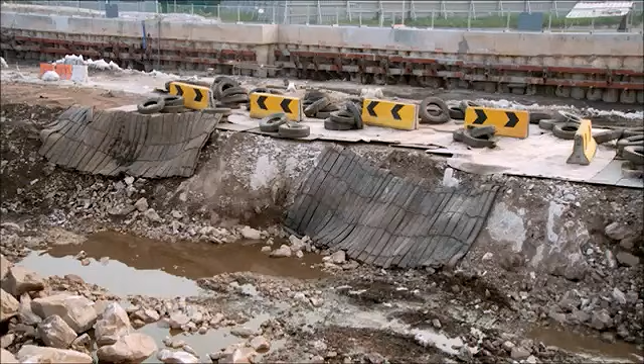Now there's an ambitious solution. A new transit system that will crisscross not only the city, but the entire region of Greater Kuala Lumpur. Huge machines will bore into Kuala Lumpur's treacherous bedrock to carve out almost 10 kilometers of tunnel.

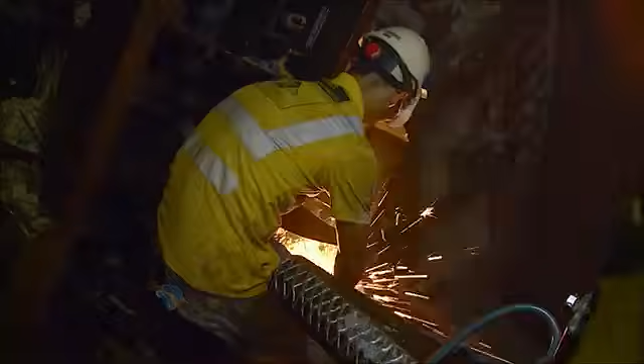Every day of construction, the engineers confront the perils of mechanical failure, fire, and collapse. Get it wrong and billions of dollars of investment could go to waste, and the streets of Kuala Lumpur and its pent-up economy will stay trapped in gridlock.

Kuala Lumpur is one of Asia's most vibrant cities. It's looking to compete with the region's Asian tiger economies. Its magnificent skyline testifies to its soaring ambition. But at street level, it's a different story. The city is blighted by severe congestion that threatens its future growth.

Over 7 million people live and work in the Kuala Lumpur region, the Klang Valley. Every day, they head into town in 4 million cars. As an alternative, a light rail transit system was built. But over time, it has been overwhelmed, and connections are inadequate.

Now there's a solution: a new mass rapid transit system that will reduce the pressure on traffic and unite far-flung parts of the city. For any modern metropolis to be vibrant, to be competitive, to be on par with some of the leading cities in the world, you've got to have a modern public transport system.

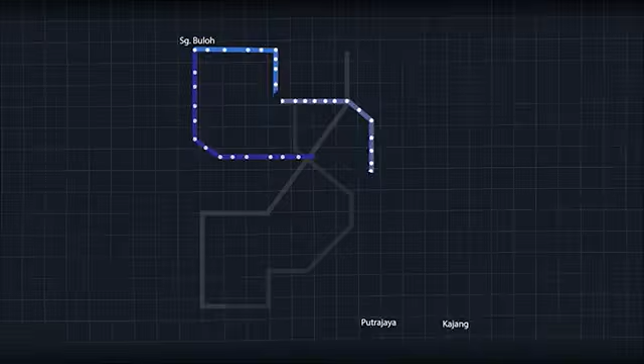The Klang Valley Mass Rapid Transit System, the KVMRT, is Kuala Lumpur's bid for greatness. 3 different routes comprising more than 150 kilometers of brand new lines. It will be seamless travel around the Klang Valley, especially the areas of high concentration population. And the first stage of the plan is the biggest test of all.

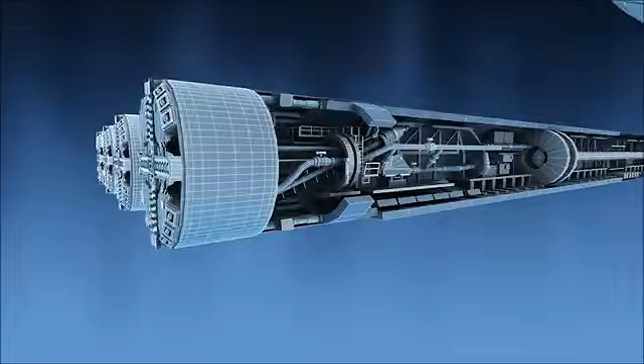This is the Sungai Buloh Kajang line. It will stretch 51 kilometers with 31 new stations. And a fifth of the new line will have to be constructed underground. To do this, 10 giant tunnel boring machines, or TBMs, will be brought to Kuala Lumpur and set to work.

These mighty engines do much more than burrow through rock, astonishing though that process is. As the huge drill crunches forward, the back end constructs the tough tunnel frame with high-strength concrete. In charge of this massive operation is engineering veteran Satpal Bogal.

Most cities now, for railway mass transit systems, the tunnels are built using TBMs because of safety issues and because of ground conditions. The underground section of the new MRT will be a perilous undertaking. For beneath Kuala Lumpur is a formidable engineering challenge.

Below the city are 2 very different kinds of rock, and the TBMs will have to deal with both. The western area is known as Kenny Hill, and the eastern areas as the Kuala Lumpur limestone. Imagine the difference between a Dutch Edam and a Swiss cheese riddled with holes. Dr. Uilian Hock is the project geologist and expert on Kuala Lumpur's underground world.

I got this Dutch Edam cheese here. As you can see, this whole piece of cheese is fairly homogeneous, very tight. And Kenny Hill, when it's weathered, it looks something like this. This is like the KL limestone. All right, this is Swiss cheese.

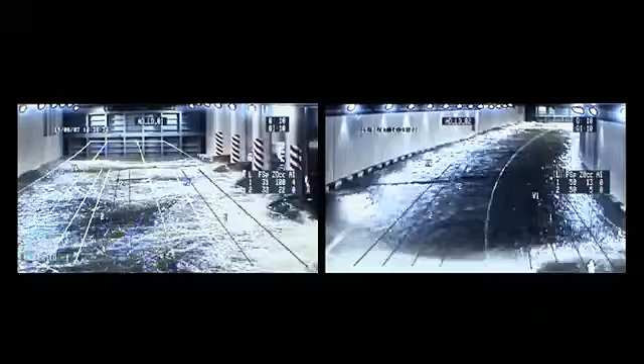This ingenious system was used by the engineers who built the Smart Tunnel in Kuala Lumpur, the world's first combined storm and traffic tunnel. But builders learned some hard lessons about slurry. Ng Hawe was a rookie engineer on this project. We have the best machines in the world in the SMART project, but we still do have some problems. We just couldn't control the slurry and it easily escapes to the surface, creating sinkholes.

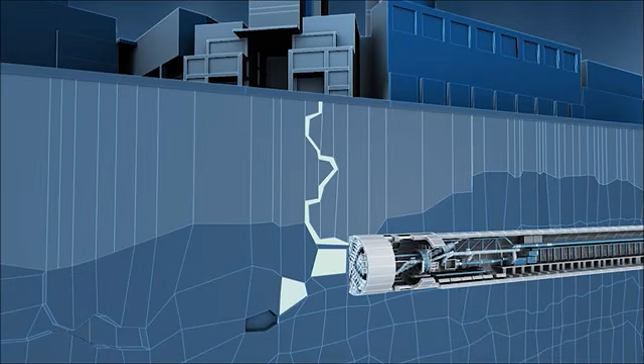What Ng and the engineering team found, to their cost, was that the slurry they injected into the limestone cavities could escape into surrounding rocks and cause havoc, bursting from the ground like a geyser or creating sinkholes at the surface that might suck in people, cars, or buildings. Today, Ng heads the tunnel team building Kuala Lumpur's MRT system. And this time, he had to find a solution to the uncontrollable slurry problem.

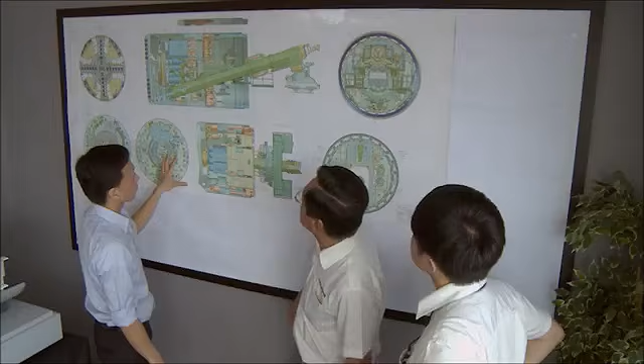Working with German company Herrenknecht, Ng and the team of engineers have come up with a revolutionary kind of machine. We throw in all the ideas, we have brainstorming sessions, we consult a lot of experts, we have to do a lot of research because no machine has been designed like this before. From these brainstorming sessions was born this mighty machine. Called the Variable Density Machine, it's the state-of-the-art tunneler. For the first time, a TBM can control the consistency of the slurry and take on whatever Kuala Lumpur's underground throws at it. Even the construction of this revolutionary machine is on an epic scale.

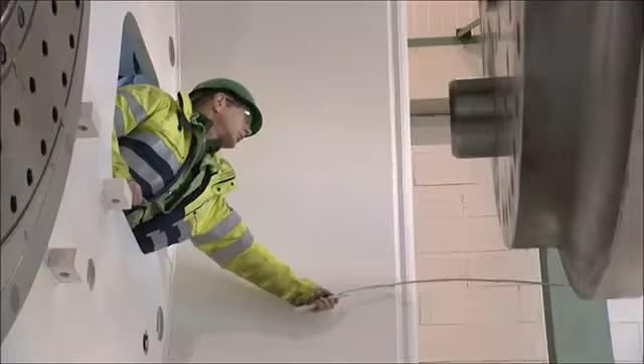Components are brought from all over Europe to be assembled inside the massive factory in Schwanau in Germany and other Herrenknecht plants in China. One machine like this is fitted together with about 40,000 pieces, one by one. The design starts screw by screw, piece by piece, and this is brought together with all our 400 engineers. They do all these works to come to this level, what you can see today. It takes 9 months to manufacture the revolutionary TBM.

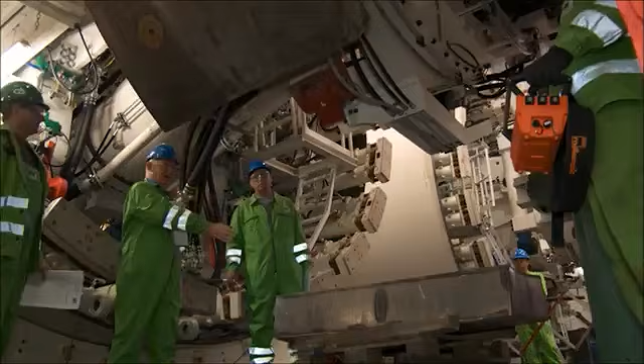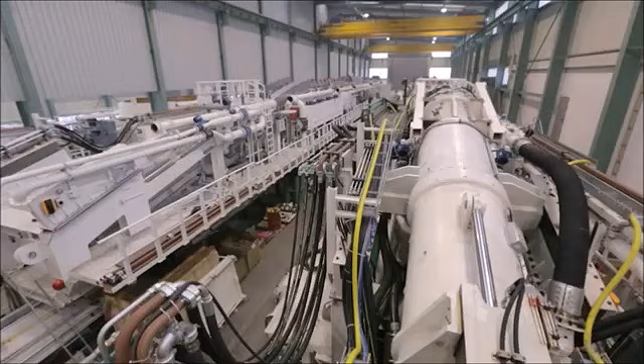Today, it's ready to be put through its paces. We have only seen it on the drawing board so far. So this is the first time that it is all put together. Everything is running, so we can check every equipment, including the cutter heads, the hydraulics, the safety features. This is the last chance for us to make final modifications before we send it to the site and put it in the ground.

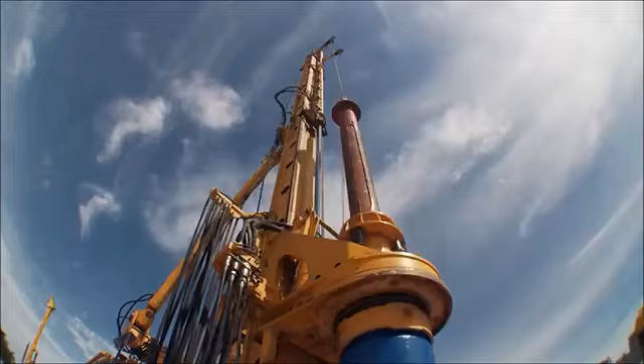As the engineers work on the TBMs in Germany, work gets underway in Kuala Lumpur. The engineering company in charge of tunneling, MMC Gamuda KVMRT, must complete the job in 24 months and with minimum disruption to the city above. The operation is conceived on a military scale and with military precision. The TBMs will be launched from 4 different staging zones along the planned route of the underground section of the MRT. At the western end of the tunnel, the elevated section of the MRT begins its descent underground from the surface. But at the 3 other zones, shafts must be excavated so that the different TBMs can be put to work beneath the city. Eventually, the different sections of the 9.5-kilometer tunnel must all link together.

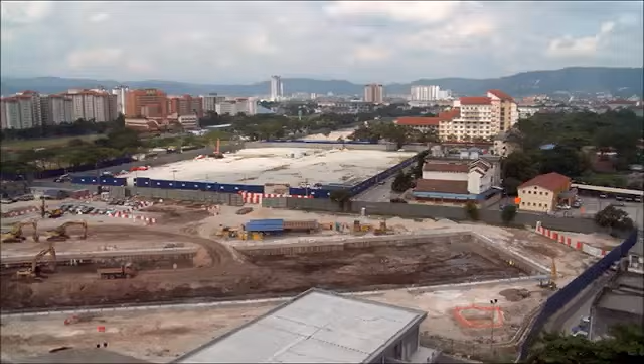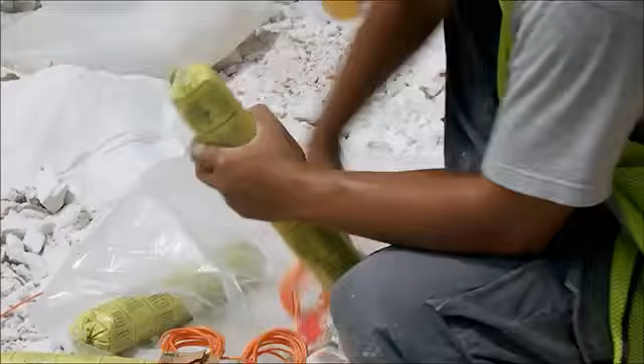Since July 2011, work on Kuala Lumpur's new MRT starts here at the Cochrane site. It must be dug out to a depth of 30 meters before 4 TBMs can be deployed. The huge staging zones will be blasted out of the ground. We have short time to meet our requirements, so we are working with frequent blasts, more than 2 or 3 blasts a day. The blasting must be carried out with rigorous precision, especially in a city as dense as Kuala Lumpur.

So when you talk about blasting itself, it's dangerous. You can see we've been surrounded by high-rise buildings. Now at the moment you're using about 150 to 200 kg. So that can bring a 10-story building down. The solution is to sequence each blast, creating a pressure wave that, in theory, won't damage surrounding buildings.

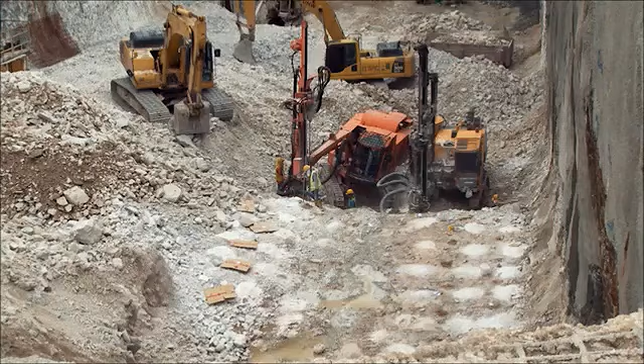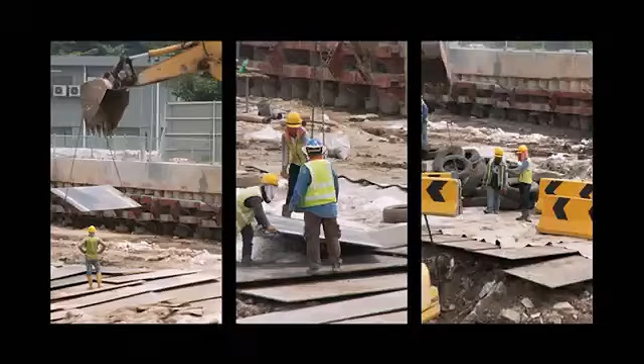These are the basic things we use. My hand now is explosive, which will be charged to the detonators over here, and it will be connected one at a time, and finally we have delays. This will segregate the blasting rather than at one go. Engineers dig rows of holes between 3 to 6 meters deep. Then the explosive charge is inserted inside with a detonator. These are connected to a central command point. But nothing is left to chance. Giant barriers of steel plates, truck tires, and concrete prevent debris flying from the site. The charge is set.

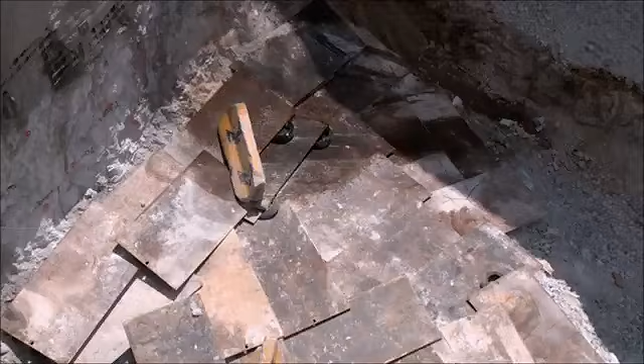The engineers have got the right formula, and the surrounding buildings are safe. The blasting continues at the Cochrane site for 7 explosive months. Enough rock and soil to fill 50 Olympic-sized swimming pools is blown out of the ground. And finally, the site is ready to receive the first TBM.

Its code name, 774. At the beginning of 2013, the first new model arrives in Kuala Lumpur. The giant machine is transported in parts to the Cochrane site on huge lorries. But that's the simple part. Now, the 160-ton monster must be lowered into the excavated shaft so that they can start chewing into bedrock.

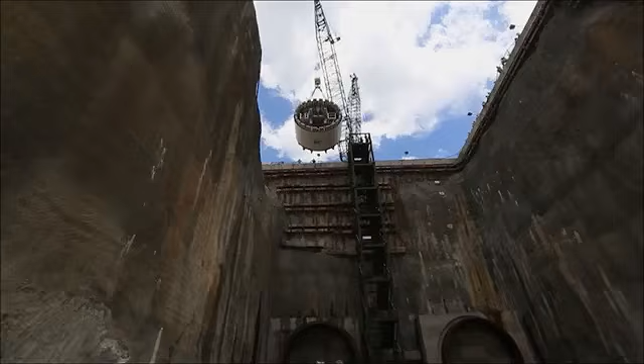To lift it down 30 meters down the shaft, we have to be very careful. Anything can go wrong and then we are stuck. It will push back the whole project completion by a lot. At the site, everyone is holding their breath as the TBM begins its descent underground.

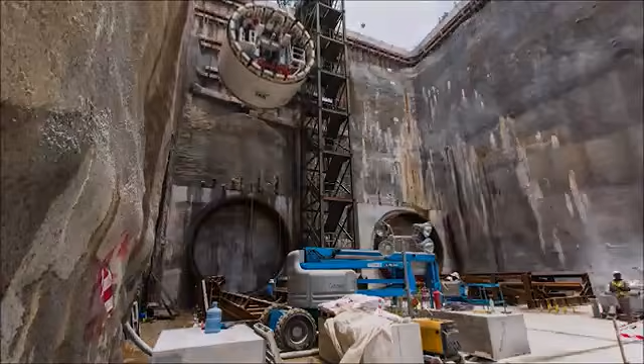Malaysia's capital, Kuala Lumpur, is being transformed into a huge building site. A new MRT system is under construction. Close to 10 kilometers will be built beneath the city, and a revolutionary new tunnel boring machine, or TBM, is brought from Germany. The first to be sent into action weighs 160 tons and has to be delicately lowered 30 meters to the tunnel entrance.

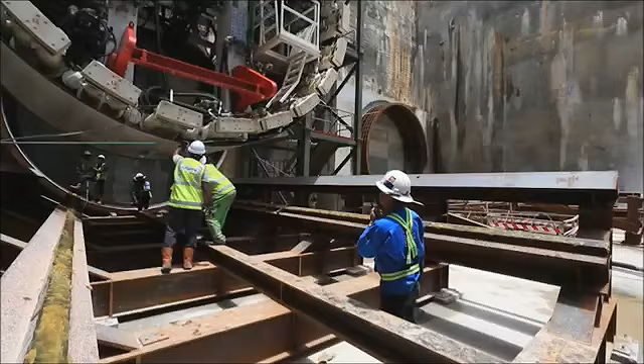The man in charge of the tunnel operation is Ng Hao Wei. He won his spurs building Kuala Lumpur's famous smart tunnel. And we are dealing with very delicate components. We cannot afford to damage it. If the extent of damage is huge, then the impact to the project will be tremendous.

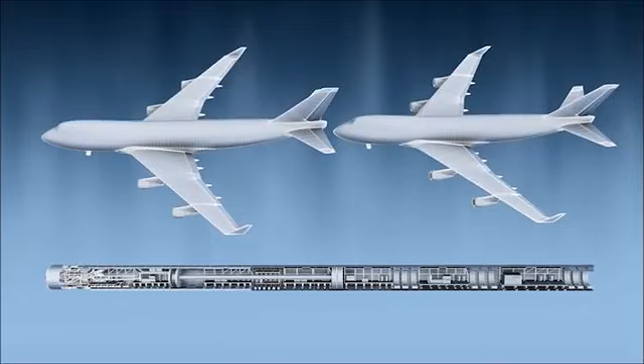This is literally the cutting edge, the business end of the huge machine. The circular cutter head weighs 70 tons with 37 tungsten carbide cutting discs, which are stiffer than steel and denser than titanium. The entire TBM is 135 meters long, almost double the length of a 747 jet airliner. Each TBM has 10 interconnected gantries to support the operation.

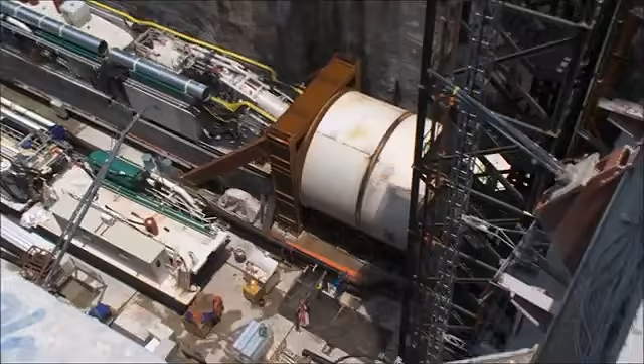Only 3/4 of the shaft has so far been excavated, so the monster machine has to be assembled in sections. We assemble up to the 6th gantry, which will give us the key components of hydraulics and electrics, so we can start to launch the machine, at the same time give sufficient space for the shaft excavation to go on. It takes just under 3 months for the TBM to be assembled.

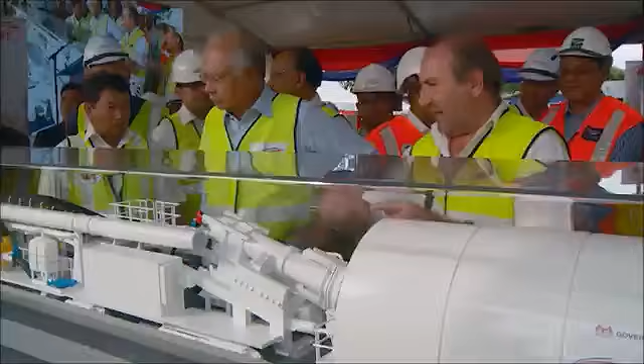The Prime Minister of Malaysia launches the very first variable density TBM. It's actually a technological marvel. And it goes to show that, in partnership with a German company, Malaysians can offer a lot of our technical guidance and advice. This is something that we can be really proud of.

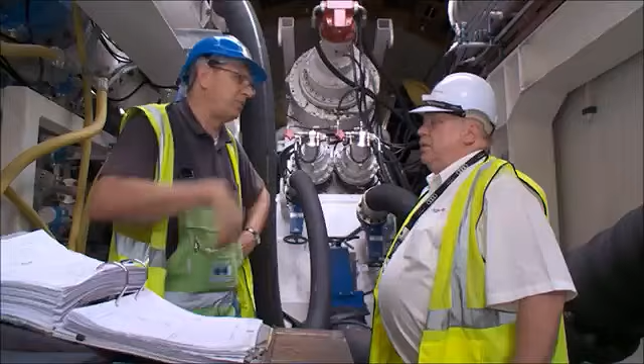One day later, Ng Hao Wei and his mentor Gustav Klados arrived to check on the machine's progress. Gus, a veteran Hungarian tunneler, has worked on some of the biggest tunneling projects in the world, including the Channel Tunnel linking Britain and France, and the Smart Tunnel here in Kuala Lumpur. This tunnel warrior is the team's project manager and is thrilled to be working back in the city on the new machine. It's uncharted territory.

We are trying out something totally new. A lot of people at the beginning said, no, it won't work. But now it is excavating. You can hear the stones moving around in the pipe, so it's a fantastic noise. It's my favorite. Much better than in the office. It's not just the machines that will need breaking in. The giant TBMs must be served by an army of workers, day and night, week after week, month after month.

I'm new here, but I try to make my best every day. Everybody starts as new. Trust me. Me too. I did start as a new guy. Do you? Yes. My first job was to go and count the number of nails and bolts and nuts in the stores. And I went there and literally counted them for a week. When I finished, went to the storekeeper and he told me that we usually use a scale.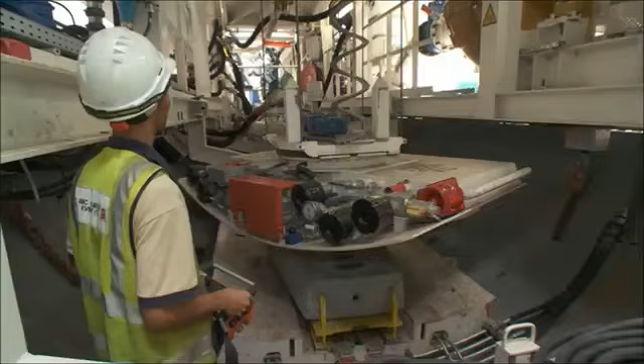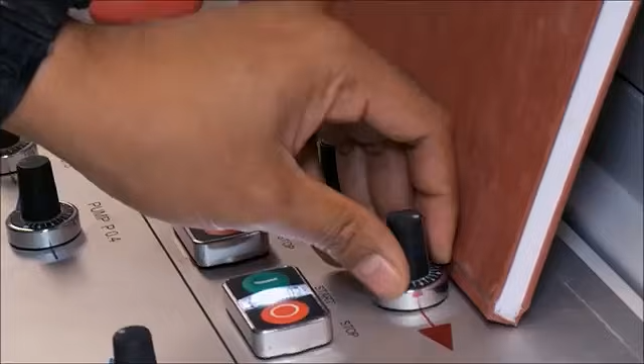The MRT tunneling project will need thousands of workers over the 2-year period of construction, and MMC Gamuda set up an academy to train the hundreds of workers needed to finish the tunnel on time. Veteran or newcomer, the team faces a daily avalanche of problems, and right now, the problem is pretty basic. The TBM is just not picking up speed. 8 millimeter a minute. Not very fast. But it's all right.

At this pace of tunneling, the project will take 4 years longer than expected and run millions of dollars over budget. But veteran engineer Gus Klados hopes that the giant machine will soon pick up speed. In the next few months, it is just to sort of break in the machine like a horse which has never been ridden before. And I am convinced that we will make it work.

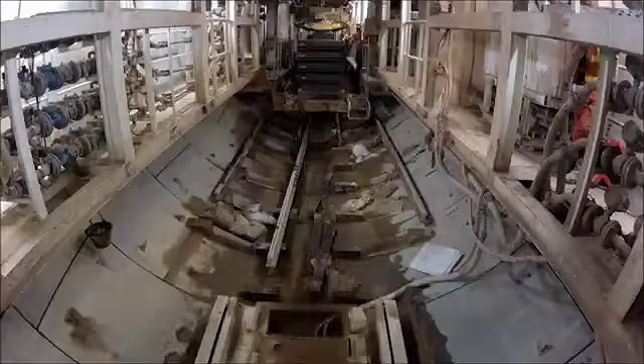The team is under pressure to complete the tunneling works on time. In the tunnels, the TBMs never stop mining. It's a 24-hour operation. And 3 weeks since mining began, the giant machine has at last picked up speed. The TBM is like a huge underground factory, drilling, building, and spewing out waste. The heart of the entire operation is in this tiny space.

So what's happening? Pressure sensor number 4 is a broken wire. Control cabin means the heart, the control center, the heart of the TBM where everything is controlled. We need to push one. If you're building a skyscraper, visibility is not normally a problem. But underground, it's a different story. You can't see through rock.

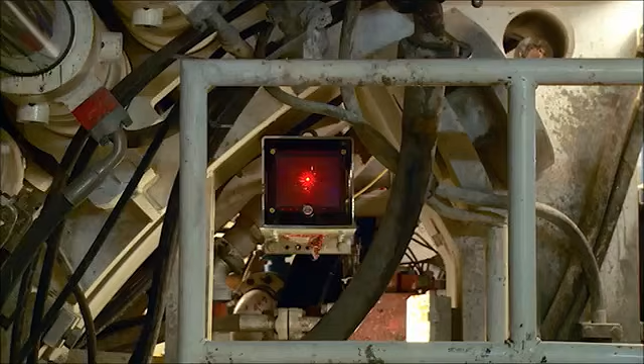So to give the TBM underground eyes, the machine is equipped with arrays of sophisticated sensors. It's like when you are working in a submarine. You have to depend on the sensors, you have to depend on communications, you have to depend on eyes other than yourself. You can't see anything. Inside the control cabin, engineers can work out with absolute precision the real-time position of the TBM, calculate changes of direction, and when to start lining the tunnel wall.

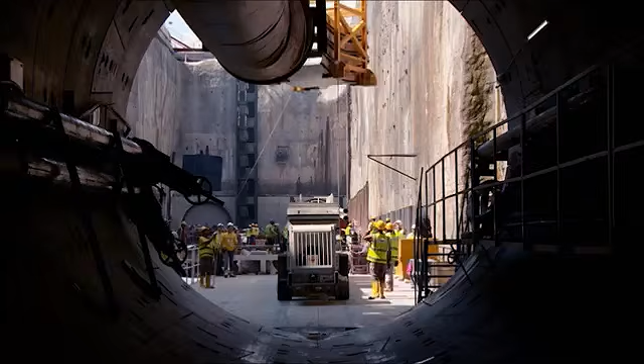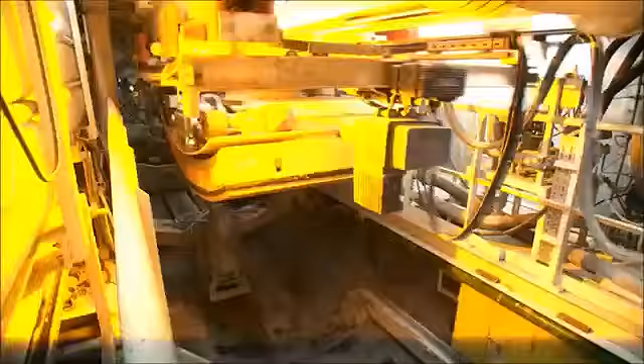After a mining of about 1.4 meters, we will build the segments piece by piece and then build them up like a jigsaw puzzle. These tunnel rings are made from 7 segments plus 1 keystone that holds everything together. The concrete wall segments can withstand extreme pressure 30 meters underground. All day long, concrete segments arrive at the TBM. Each segment weighs 2.2 metric tons. Giant hydraulic arms swing the segments into place using the TBM's vacuum erector, which uses the power of suction to raise and position each segment.

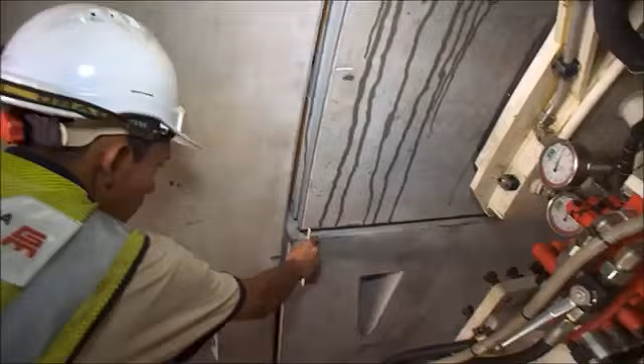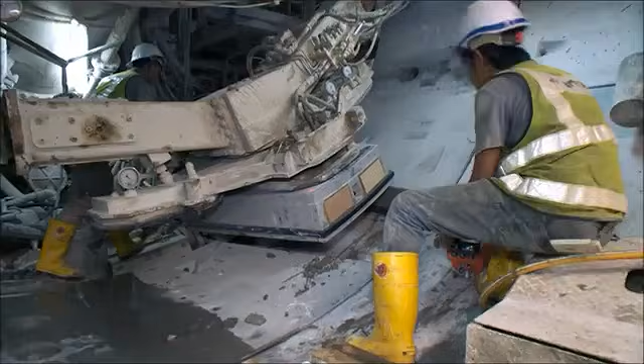Precision is essential. If any one of these segments is wrongly positioned, the consequences would be catastrophic. So it's very important to drum into the ring building team that they have to build it to the required tolerance of a few millimeters precision. If we are out of tolerance, the water will find its way to seep through and we'll have a great problem to seal it up. Over time, as graduates of the Tunnel Training Academy get more experience, the process builds up momentum. In the first week, the teams managed to place just 3 rings a day. 3 months in, and the rate is 5 times higher.

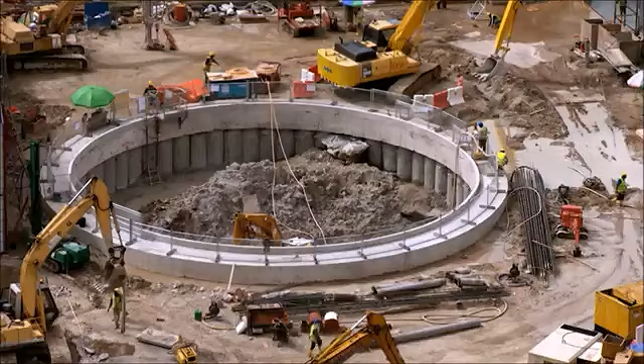The campaign to excavate Kuala Lumpur's new MRT tunnels is about to enter a more intense phase. By November 2013, 4 TBMs have been successfully launched from the Cochrane site. But at another launch site near Inai Road, the engineers have run into difficulties. Here, 2 circular shafts are being excavated to 30 and 45 meters in depth. But as the shafts are blasted out of the ground, disaster strikes.

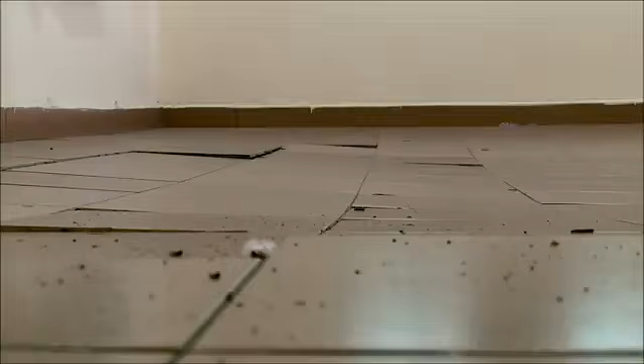The hole in the garden is frightening enough, but the condition of Mr. Jamal's home is even more alarming. Floors dip and cracks ripple up walls and across ceilings. The family home is falling apart.

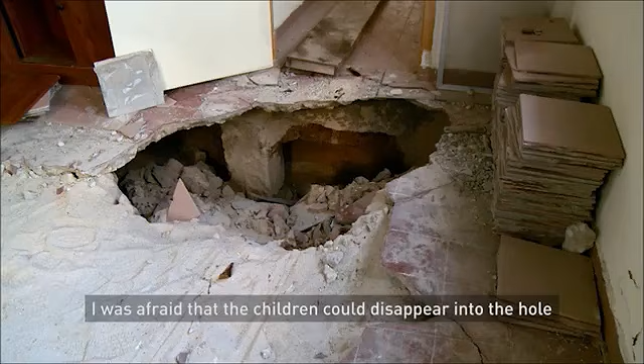Terrified, Mr. Jamal calls the company in charge of the MRT project. When inspectors see the condition of his home, they make an immediate decision to move the family out. Engineers now need to explain what has gone wrong and whether other homes are at risk. In limestone, what happened is that the solution features can be connected laterally and vertically. What happened is we drill a shaft. So this hits a connection. When there's a hole, it's like a pipe culvert.

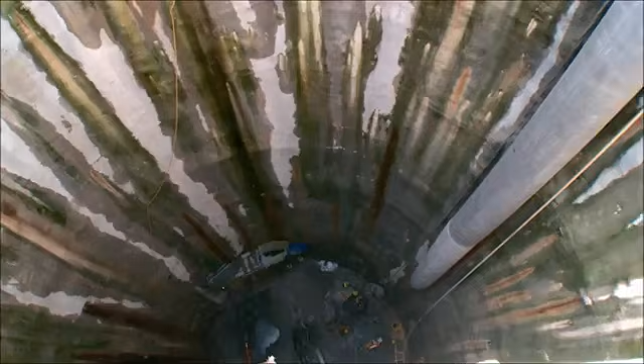If you have a culvert connecting from the shaft to underneath Mr. Jamal's house, that forms a very easy flow passage of water, bringing the soil from underneath Jamal's house into the shaft. And that results in sinkholes. And it's not only Mr. Jamal's house that's in danger. Water is pouring in from the walls in the deeper of the 2 Inai shafts.

It's unstoppable, and the situation is a tough call for project director Satpal Bogal. We couldn't stem it, and the decision was taken to backfill it for safety. And that decision then followed on to other changes to the program. Abandoning one of the 2 Inai shafts is a huge setback. Now only 1 TBM can be launched from here. This means that a new strategy has to be devised.

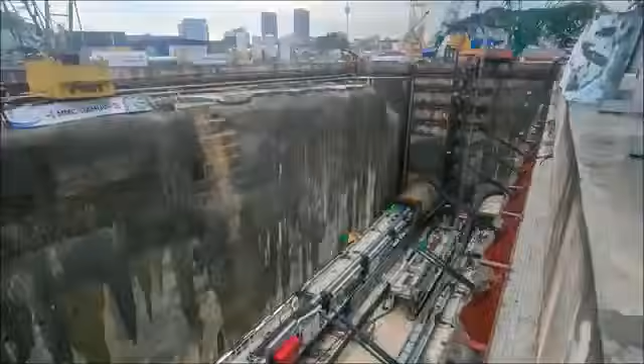The first TBM to be brought to Malaysia, 774, that has been mining from the Cochrane site, must now make up the difference and tunnel more than twice the distance. It will put the complex machine under severe strain. It's not only flooding that makes the Inai launch site such a headache for the engineers, it's a very tight fit compared to the other launch sites.

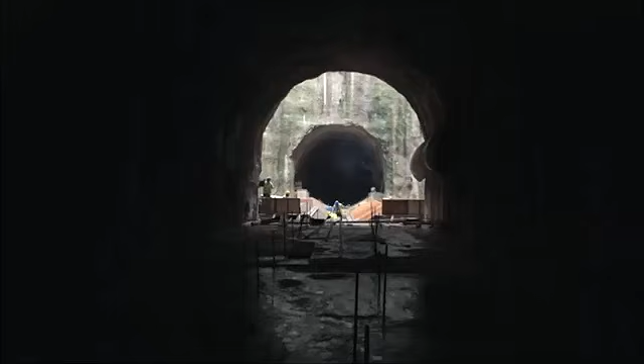Tunnel engineer Aslan Marzuki is in charge of getting the huge TBM to the bottom of the shaft. It's a smaller shaft. It's not a square, it's a circle. That's a safe space, but that means that our launching is going to be staggered. The team will blast out tunnels on both sides of the shaft. Then the front section of the TBM is inserted. Next, 3 out of the 10 gantries will be lowered one by one, followed by the giant screw. The problem is that the 18-meter screw segment is wider than the width of the shaft.

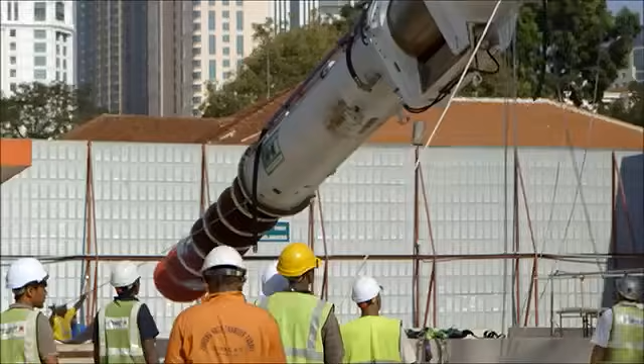Behind me, this is our biggest component that's going to be lowered down. It's the most difficult one because this length is actually bigger than the shaft itself. The solution is simple, but risky. The screw segment of the TBM will have to be lowered into the shaft at an angle. We have to tilt the screw conveyor at a 36 degrees angle. You have to use a chain block, a hand winch to pull the machine upwards.

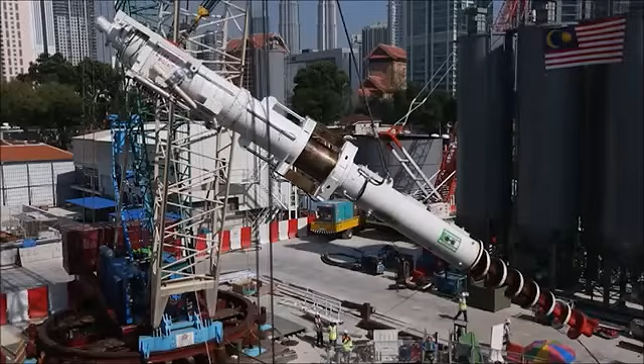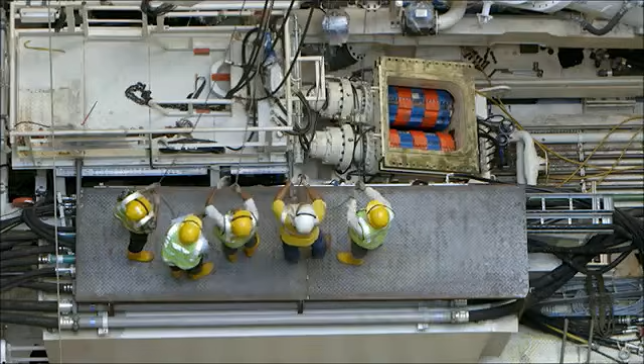It sounds simple, but that giant screw weighs a whopping 15 tons, and any deviation from that critical 36 degrees would be catastrophic. At the bottom of the shaft, the engineers face another challenge. The angle of descent has to be lowered. It's another fiddly maneuver with a lot of complicated machinery at stake. When you lower it down, the final angle is 15 degrees. Down there, you still have to do the same exercise again, but it has to be a slow process. After 2 hours, the screw conveyor is finally in place.

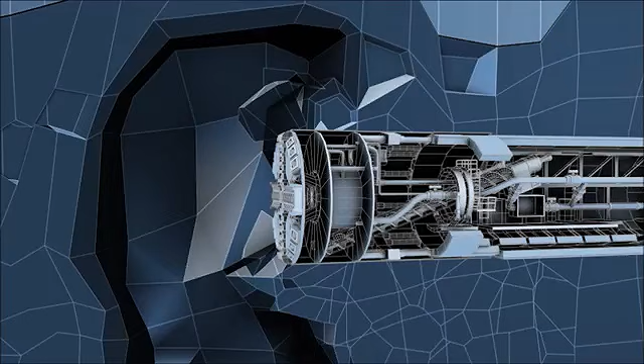It takes 3 months of hard slog to put the TBM together, but at last, it can begin burrowing into the limestone. This underworld is packed with hidden dangers. Like Swiss cheese, the rock is riddled with cavities that could wreck the multi-million-dollar boring machine. When you're tunneling this way and you have a cave directly underneath your cutter, and it's big enough that you cannot develop a face support and the thing just dips inside, then we are snookered. It will take us months to recover or to bring that TBM cutter face into operations again.

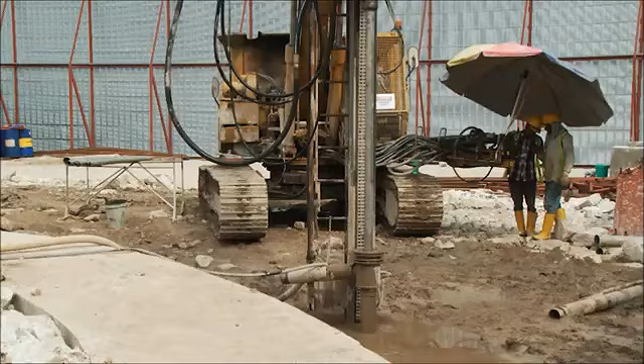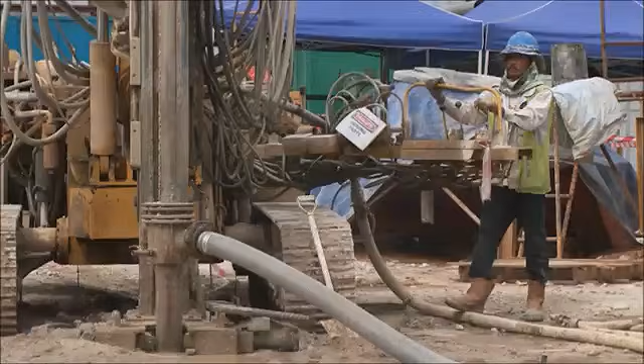So as the huge drill edges forward at 14 meters a day, an army of engineers is busy scouting the perils that lie ahead. They drill hundreds of boreholes into the layers of rock. Once a cavity is detected, concrete is poured into the hole to shore it up. It's a process called grouting. If we do encounter such a thing, then we'll do a lot of compaction grouting to fill up this void, like you go to a dentist to fill up your cavity, to ensure that when we are tunneling through, the TBM can go through safely.

But some cavities can be less than a meter wide. These are much harder to fill, but still pose a threat. There's no way we can pick it up. We are unable to treat all these features along our tunnel alignment. So what we then need is a machine that can cater for all these little challenges. Enter the new breed of tunnel boring machines.

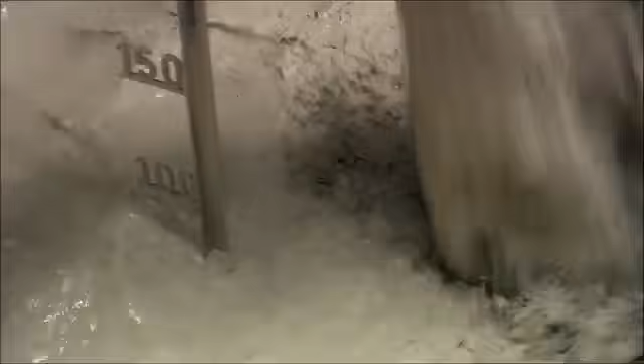Behind the drill, a sealed high-pressure chamber is pumped full of liquid called bentonite slurry. Unlike previous models, the new TBMs can control the density of this thick gray liquid, changing the consistency from a thin, watery liquid to a thicker, honey-like substance. The thicker slurry is used to fill these hidden cavities, and its density prevents it escaping through the porous rock to the surface.

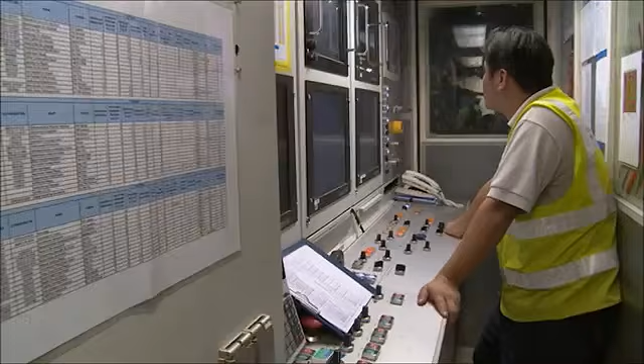The machine is able to operate at different modes at the flip of a button or some switches. So by doing that, in situations where we have major loss of slurry into here, we can then switch to a thicker density. It's kind of a little paste that chokes this up, and then we can mine through very easily. The revolutionary new tunneling system soon proves to be a success.

But there is a problem that all tunnel engineers fear at the back of their minds. Fire, every tunneler's nightmare. For engineers excavating Kuala Lumpur's new MRT system, the most terrifying scenario is a fire in the tunnel. A blaze can suck oxygen from the air in seconds. Workers can suffocate with terrifying speed, and the tunnel itself works like an oven, insulating the environment and ramping up temperatures to deadly levels.

Tunnel workers must be ready to react at any moment, and training exercises are made as real as possible. Christopher Fenton, head of safety, health, and environment for the underground, is training the company's emergency rescue team. Tunnels are very dangerous during construction. Fire is the last thing we want, and we need to be able to respond to it very quickly if it did happen. He has brought in two fire experts from the Los Angeles Fire Department to help with the training.

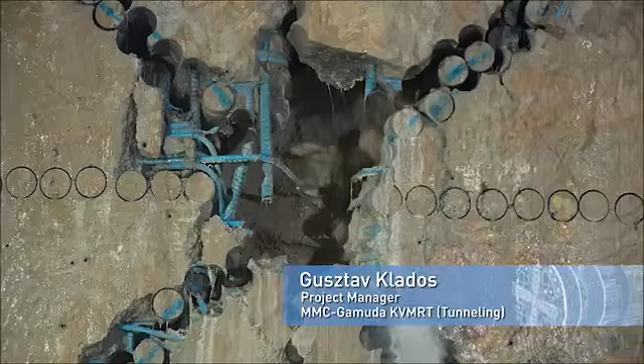Christmas Eve 2013, and the MRT engineers have cause to celebrate. One section of the tunnel, where the MRT line dives underground at Semantan to the Museum Negara station, has been completed. It's the project's first breakthrough, and at any moment the TBM drill head will emerge from this tunnel. It's an anxious wait for tunnel manager Chin Raymond. I told him if it doesn't come in the middle, it has to jump off a cliff somewhere. After drilling for 6 months, the TBM punches through right on target.

Okay, thank you. Congratulations. Thank you. Well done, man. Okay. Good. Yes, great. Finally, I pushed my machine, it came in. I've been working for more than 24 hours. I can have a good rest to enjoy my Christmas.

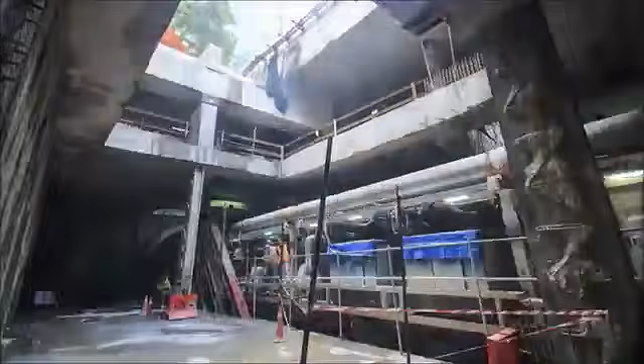But the machines don't get a holiday. As soon as the TBM completes its breakthrough, it is hauled into position to begin work on the tunnel that will link Museum Negara to the next station. The TBM is now burrowing beneath the historical heart of Kuala Lumpur. The Museum Negara is a repository of the nation's history and culture. Its facade is lined with precious mosaics.

Further along the path of the excavation is the old railway station, an icon of the past that stood the test of time. But can it withstand the mighty TBMs as they thread their way nearby? We were stuck with having to cross under some sensitive structures, and the ground settlement would affect the existing structures. If there's too much ground settlement, the buildings could collapse.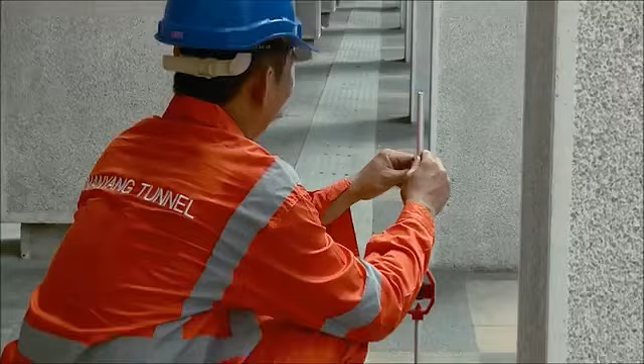For the old building, actually, we had to pay much more extra care because we don't know how good is the structure, don't know how good is this building foundation. So we had to pay extra precaution on that. A team of surveyors now equip these venerable buildings with highly sensitive sensors that monitor every vibration.

As the TBM approaches, Tae Chi Yong and his team of surveyors nervously carry out hourly tests to monitor the old buildings. The TBM is below this building directly. You get to monitor the effects and the impact of our TBM drive on the structures above, on the surface above. It's a nail-biting 5 months of constant monitoring as the TBMs negotiate this historic region. And at last, the TBMs inch past. The iconic buildings are safe.

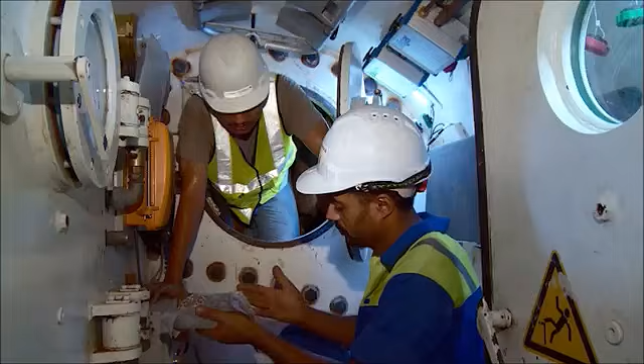While the people of Kuala Lumpur get used to living and working in a massive work site, where giant boring machines gnaw away at the city's bedrock to build a new MRT, the President of the United States will be descending on Malaysia in 3 days' time. But all is not well with TBM 774. Located less than 400 meters from Obama's planned accommodation, the TBM gets a bad case of indigestion and is unable to process the waste from the cutter head. It has come to a halt.

Directly above the TBM, a team is tasked with monitoring road surfaces to look for any signs of trouble. Called the Bull Gang, it is led by Michael Poon. We have a team of people patrolling 24 hours. We have to check on the surface. This morning I walked by, I saw some settlement. It's just a small depression. I can see the hole. It's quite deep.

At the surface, the cracks don't seem to pose much of a threat. But like icebergs, most of the danger is hidden. Down there is a void big enough to fit an electric car. We have an unscheduled stop. They have to lower all the slurry. That means the face support is affected, and that causes a depression or a sinkhole in front of the cutter face.

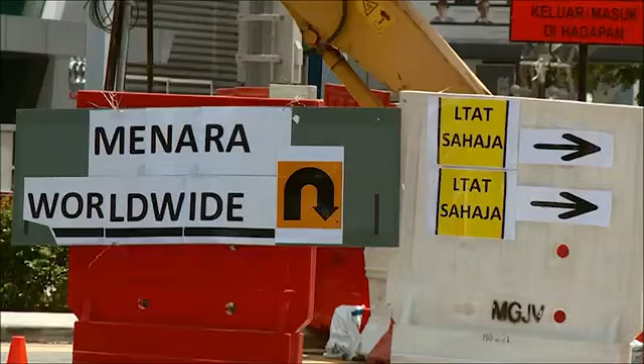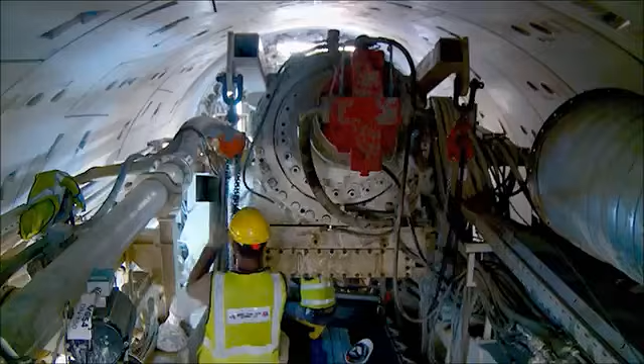An emergency response team reacts immediately. The road is closed to traffic. Then we decide to order mortar to fill up the hole. The hole is quickly filled with 5 cement trucks of concrete, and frantic repair works continue inside TBM 774.

Across town, there is reason to celebrate. The 5th breakthrough of the project will take place today. It's a landmark moment. It means that 50% of the tunnel has been completed. Well, every breakthrough is like a landing on a plane, right? Once you're there, you feel great because you brought home the TBM.

The breakthrough, I thought it was very exciting. Now we finished everything. It's very, very good. I'm very content with the progress as well. The quality of the tunnel linings that we have in the precast concrete inside is one of the best one. We work as a team. We work night and day, blood and sweat, hard time, good time. This is the prize for all the crew. This is like present.

But the celebrations are short-lived. As TBM 774 finally starts mining again, President Obama arrives in Kuala Lumpur. But to the horror of the team, another collapse occurs just meters away from the earlier sinkhole as the president is at the official state dinner. This new sinkhole is an even bigger problem than the previous one. Ground movement has broken water pipes, and the hole is filled with live power cables.

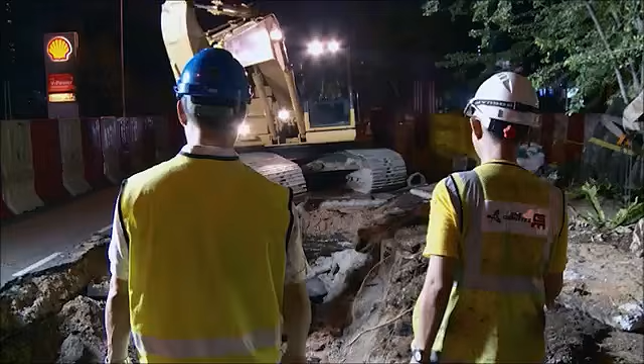President Obama is living nearby. We definitely not want to cut off water and power to where Mr. Obama is living, obviously. So we're trying to get this done in the quickest time possible. Racing against time, the Bull Gang takes 5 hours to repair water pipes and fill the hole. As they work into the night, President Obama and his entourage are blissfully unaware of the battle that is being fought less than 400 meters from their hotel.

TBM 774 is now approaching the zone where the underground geology changes from the karstic limestone to the Kenny Hill Formation, from Swiss cheese to Edam. We are going through a very distinct change in ground conditions. In normal cases, you will need to use 2 different types of machines. And you will need to have another launch shaft to do this. It will take months. But the new variable density TBMs can be retooled underground.

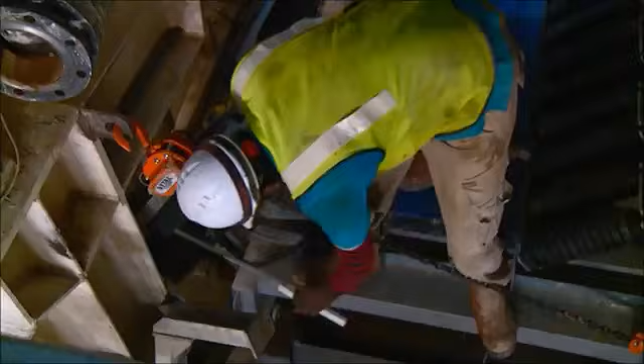It's a matter of changing the way waste is extracted. Instead of extracting through pipes, it needs to be removed with a system of conveyor belts right to the end of the gantries onto these so-called muck cars. The conversion takes 1 week to complete. But it's a much smoother process than the older system.

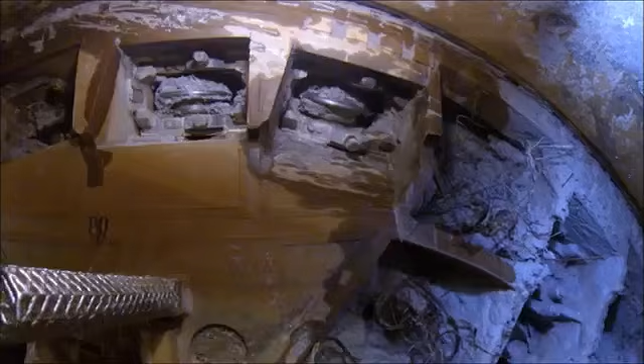But a much bigger hurdle awaits the TBM 774, an underground tangle of steel wires that could bring the TBM to a standstill. 30 meters beneath Kuala Lumpur's nightlife hotspot, Bukit Bintang, engineers excavating the underground section of the city's new MRT encounter an unexpected obstacle. Contractors of a shopping mall adjoining the street have left steel wires known as ground anchors in place, and these are bang in the path of the TBM. Put into the ground as temporary supports for the basements, they could hold up work for months.

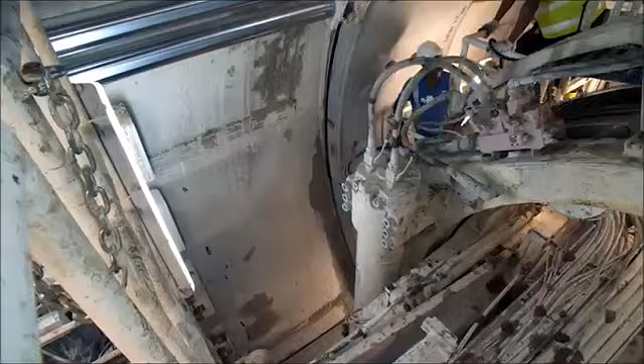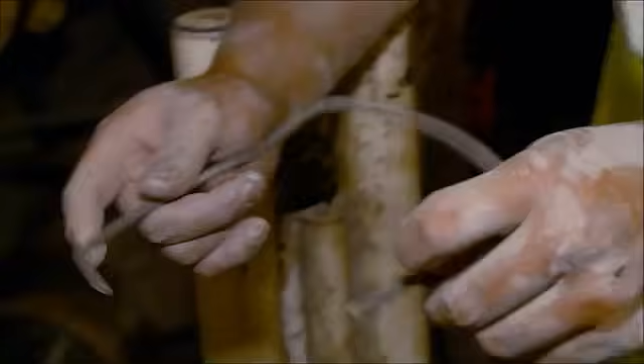It's very difficult to find them from the surface, and you cannot remove them from the basement anymore because the permanent walls are built, right? They are all covered. Since the steel wires cannot be extracted, a decision is made to push on through with the TBM. But there is a continuous risk that the drill head may become entangled and damaged in the wires. It is the task of engineer Hugh Wei Hon to monitor the tunnel ahead. So in the morning, actually, we found some ground anchors dropped underneath the conveyor belt, and we decided to stop the TBM, look for the ground anchors, cut it and remove it.

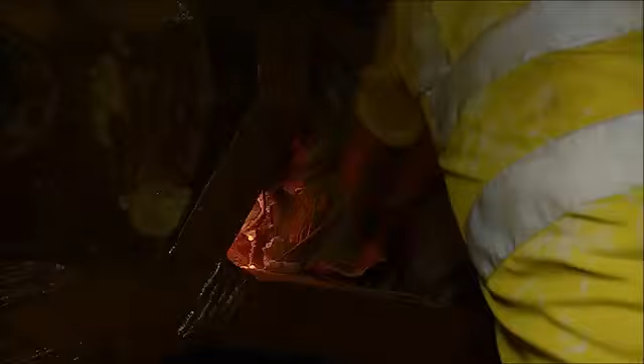A team now has to enter the space around the cutter head at the front of the TBM. There's little space to maneuver, and temperatures are close to 40 degrees Celsius. To overcome this tangle, first, the team washes away earth from the cutter, exposing the snarl of steel wires caught in the cutter head. These must be cut away with an oxyacetylene torch. It's a laborious process. Every time they hit the ground anchors, the TBM halts as the wires are trimmed away. It takes 2 weeks to mine through this web, but it could have been worse. If we had hit all the ground anchors that we expected, it would have delayed the project by about 3 to 4 months. And we were able to go down and cut these ropes so that they weren't stopping the cutter head from turning, and we carried on.

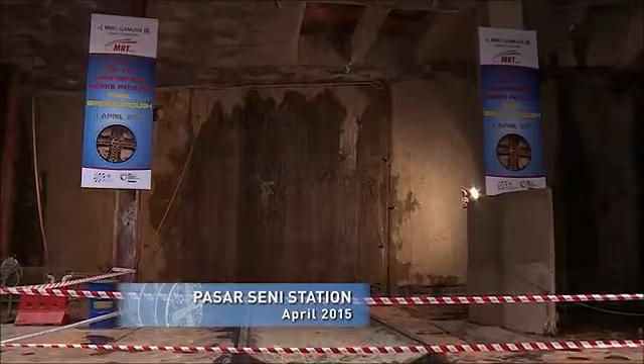It's the final breakthrough. After 23 months of excavation, from tomorrow, the TBM will fall silent. The honor goes to TBM 774. This was the first TBM to be launched into the limestone labyrinth under Kuala Lumpur. It has burrowed its way through almost 5 torturous kilometers of rock and soil. Now it must make the final breakthrough. It's a thrilling day for the engineers inside the giant machine. We are about to break through. We have about 400 mm left on the cut. Hopefully we'll get a successful breakthrough. What's happening now is we're cutting the D-wall, so that's basically the barrier between us and open air. So this is a very exciting moment for us. Any moment now, maybe within the next half an hour, we'll be out in the station.

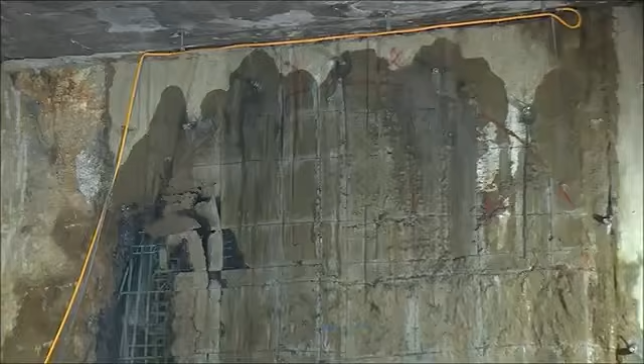This is actually the first TBM that we launched back in 2013. Less than 2 years, just short of 2 years, we have done 20 kilometers of tunneling. This is a great day for me and for the whole team.

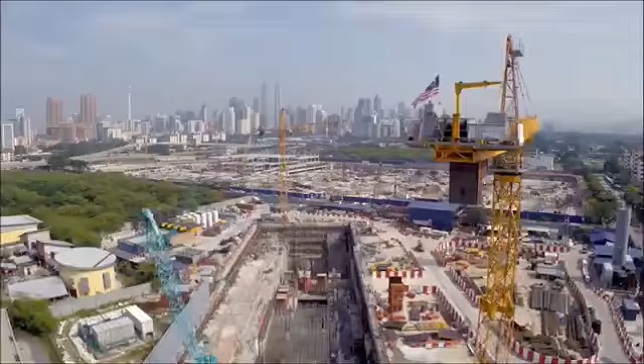The last breakthrough is a landmark moment. Now the race is on to complete the stations and get the MRT running. Only then can Kuala Lumpur's clogged up traffic arteries become truly open for business. You're basically going to live in a modern metropolis of the 21st century. This is the new world that the people of Greater Kuala Lumpur can look forward to. A city seamlessly integrated by overground and underground MRT lines, linking together the city's heart and its far-flung suburbs, where today's gridlock is a distant memory.